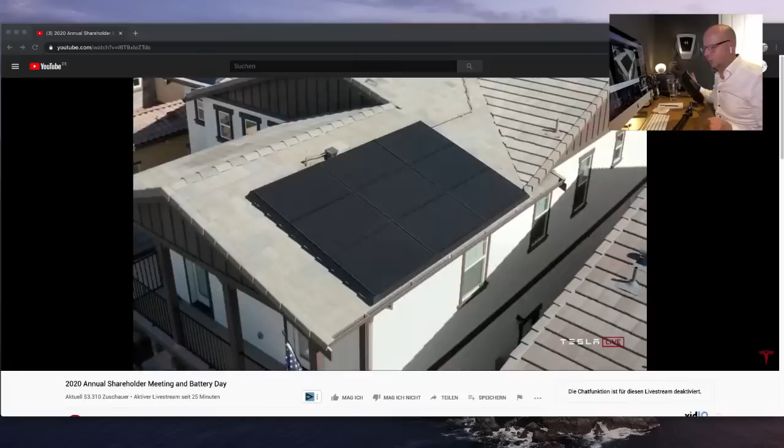Es macht keinen Sinn für mich, ein Video über, sagen wir mal, eine Zappi-Wallbox zu drehen, wenn im Hintergrund eine Heidelberg-Wallbox hängt. Das macht sich nicht gut. Also von daher werden wir demnächst da umhängen können, und dann kann ich euch auch ein paar mehr Videos zu den Wallboxen drehen.

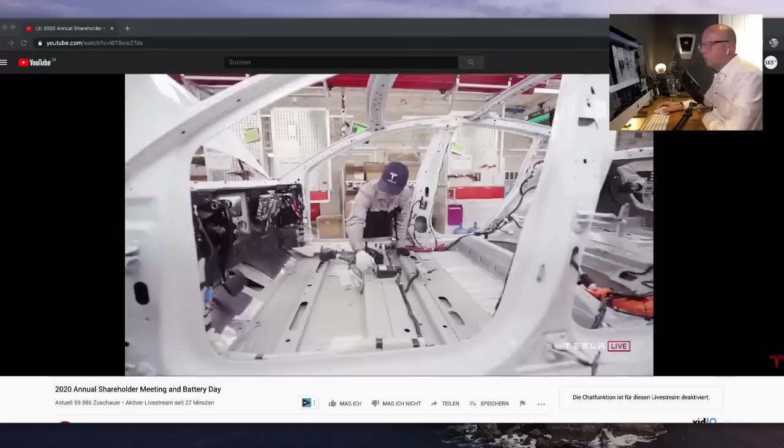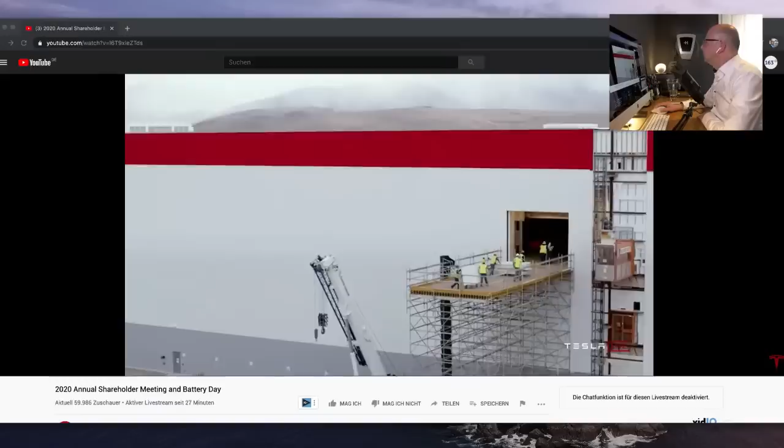Hier macht er immer Klick, Klick, wenn dir etwas kommt. Bekommst du das Klicken raus? Ja, ploppt. Wenn ich das Klicken rauskriegen würde. So, ich probiere es mal so. Jetzt ist es gemutet. Aber jetzt würde gleich das Video gemutet werden. Und insofern müssen wir mal gucken. Ich kriege dieses Klicken, das habe ich schon, es klickt. Ja, es ploppt was. Es klickt immer dann, wenn jemand von euch einen Kommentar macht. Ich mache das mal so und dann habe ich das, klickt immer noch. Also, dieses Klicken müssen wir irgendwie ertragen. Ich weiß nicht genau, wie ich es rauskriege.

Es klickt. Ja, ich kann hier nochmal gucken. Show Animated, Play App Sounds, Play Sound for certain actions. Ah ja, okay, warte. So, Klicken ist raus. Ich habe es gefunden, wie man das Klicken rauskriegt, und jetzt ist es weg.

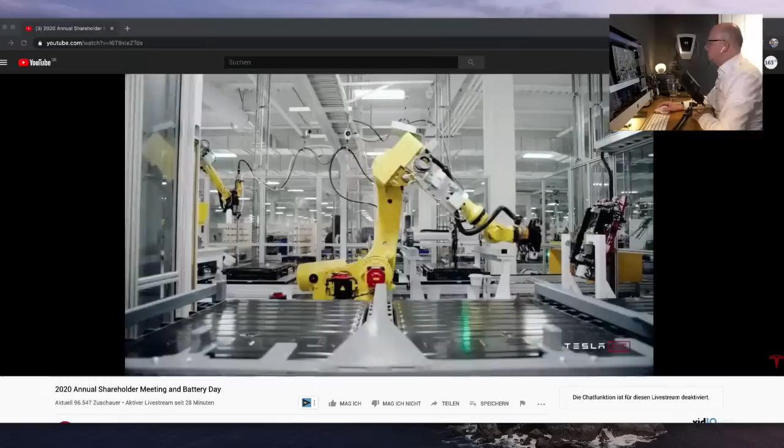Chef, bisschen leise Mikro. Ich kann das Mikro auch lauter machen, ihr müsst mir das sagen. So, jetzt ist es zu leise. Jetzt ist es zu laut. So, jetzt ist es wieder laut. Geht los, dann wollen wir mal gucken. So, das Klicken ist jetzt weg. Ich habe tatsächlich gefunden, wie man das rausmacht. Und von daher geht es los.

So, das ist der Livestream von Tesla, und tatsächlich ist hier im Moment noch nichts. 100.000 Zuschauer bei Tesla, da läuft schon der Livestream, und hier bei uns haben wir jetzt 2093 Zuschauer.

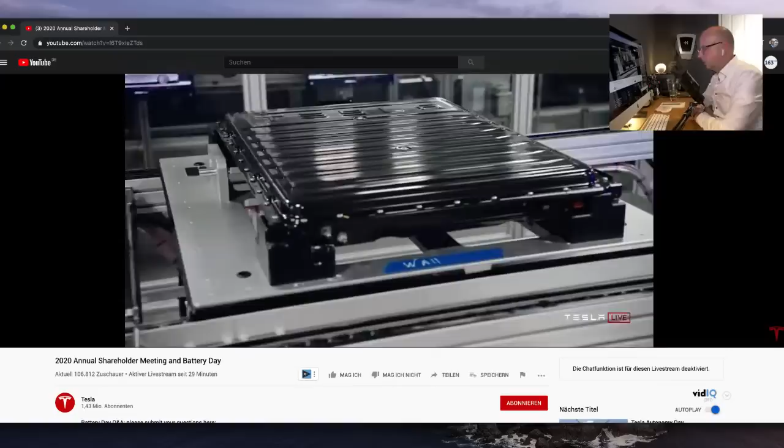So, Tesla-Video hat echt keinen Sound. Das ist auch noch nicht der Livestream, das ist ja noch so ein Werbefilm. Ich check das mal eben auf meinem iPad. Ich gehe da auch nochmal bei YouTube rein und gucke mal eben, ob wir da wirklich keinen Ton haben. Also, ich habe hier tatsächlich keinen Ton. Das ist ja auch noch nicht der aktuelle Livestream.

Warum schauen wir einen Livestream von einem Livestream? Marcel, das ist eine gute Frage. Das Ganze nennt sich hier Rudelgucken. Wir schauen es nämlich zusammen. Und insofern, Sinn macht das alles nicht, aber es macht Spaß, und darum geht's. So, wenn ich jetzt hier auf den Tesla Livestream gehe, auf meinem iPad beispielsweise, dann ist da tatsächlich auch noch kein Ton drauf. Also, noch ist kein Ton. Das ist ja auch alles noch ein Werbefilm, der uns hinhält und der entsprechend hier die Zeit überbrücken soll, bis es losgeht.

So, ich guck mal. Shoshi, Daumen hoch. Ja, natürlich. Nabend. Hat der Livestream keinen Ton? Also wie gesagt, noch hat der Livestream keinen Ton. Beim Tesla-Video ist echt kein Sound. Afrikola, richtig, also noch ist da kein Sound, noch ist da kein Ton drauf.

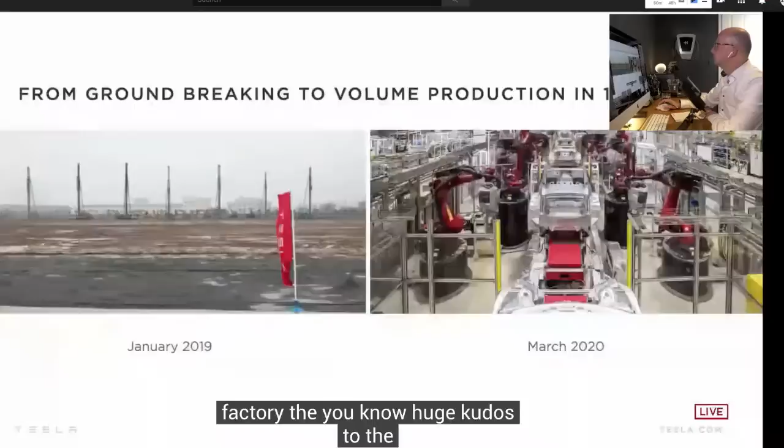I think starting from our ability to create a factory - huge kudos to the Tesla Shanghai team for being able to go from literally a dirt pile to volume production in 15 months. It's like, damn, yeah.

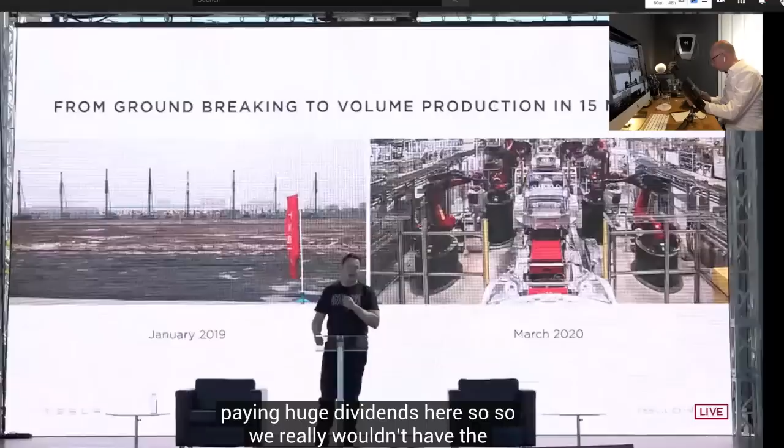I think something that's really quite noteworthy here is Tesla is the only foreign manufacturer to have a 100% owned factory in China. This is often not well understood or appreciated, but to have the only 100% owned foreign factory in China is a really big deal, and it's paying huge dividends here. We really wouldn't have the results we've had this year without the great efforts of the Tesla China team. I'm super appreciative of that.

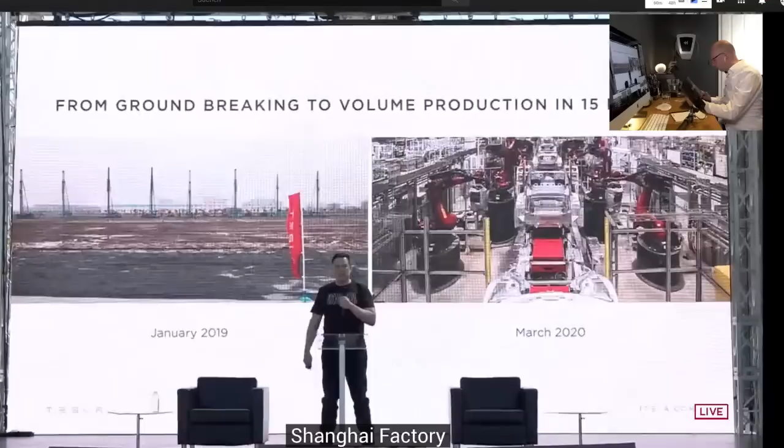We'll see the Shanghai factory continue to scale quite a bit from where it is right now. I think we could really expect that to be, over time, a factory that produces over 1 million vehicles a year. Yeah, it's cool.

So we also reached in the past year volume production of the Model Y, and this was the smoothest launch we've ever had. So I think we're definitely getting better at new vehicle launches and building factories and scaling production. As you've heard me say before, the hardest thing is scaling production, especially of a new technology. It's insanely difficult. Making a prototype is relatively easy, and if I think about what the real achievement of Tesla is in car company terms, it wasn't making exciting prototypes. It was that Tesla was really the first company in about a century in the U.S. to reach volume production and be sustainably profitable. The crazy thing is this has really not happened in 100 years. That's the actual super hard part.

And we now have 4 vehicles in volume production, S3XY. So also the toughest joke I think maybe ever - it was a very difficult joke to make.

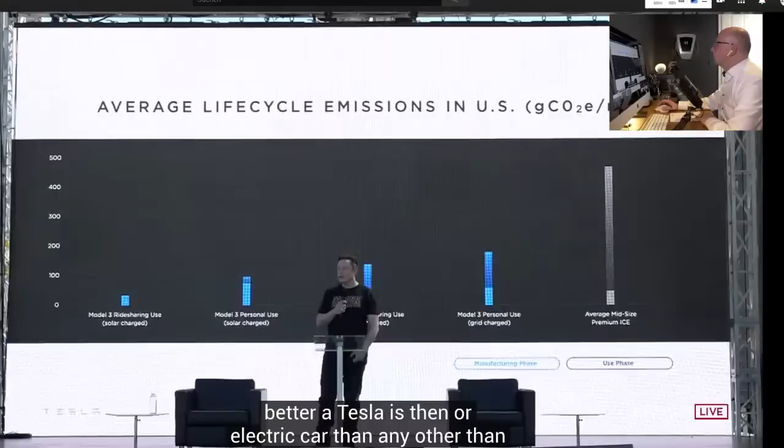It's worth looking at the average life cycle emissions in the U.S., and just how much better a Tesla or an electric car is than any kind of gasoline car. What we'll talk about in the battery day is also just how much the grids around the world, and especially in the U.S., are greening.

It's actually much faster than I think people realize. The U.S. is moving towards sustainable energy. As we move more and more to sustainable energy, you end up building the solar factories and the car factories themselves with sustainable energy. Over time you'll even mine with sustainable energy, and eventually it will get to an effective emissions of zero. So that's where things will end up.

We also have safety at the core of our design. The Tesla cars are the safest cars ever designed. We have the lowest probability of injury of any cars ever tested by the U.S. government, and that's just passive safety. When you add active safety into that, it's even better. If safety is important to you, which obviously it is, the safest car you could drive is a Tesla. Some people aren't aware of this, but safety is paramount. It is actually the number one design objective when we build a Tesla.

Our factories are also becoming safer, and if you look at accidents per total vehicle made, it's dramatically better than in the past, and it's already better than industry average. We're confident we can get it to the best in the auto industry.

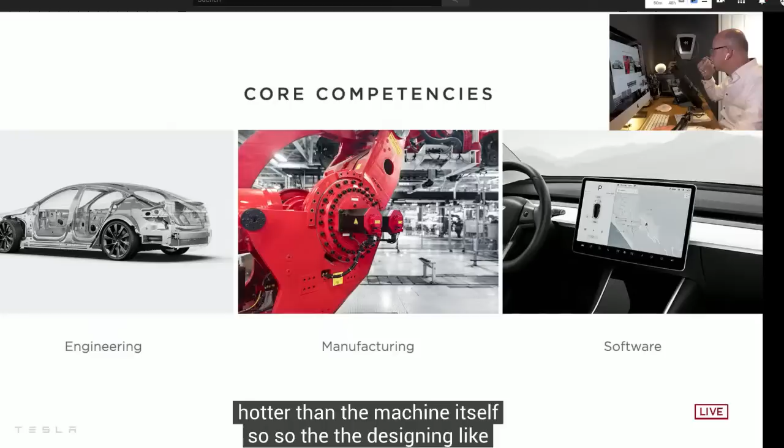Tesla core competencies: we've got engineering, obviously, but also manufacturing. I think manufacturing is underappreciated in general, and the difficulty of designing the machine that makes the machine is vastly harder than the machine itself. So designing a Model 3, Model Y, or Cybertruck prototype is really quite trivial compared to designing the factory that makes it. Especially if it's new technology and you want to use new manufacturing methods, it's at least 10 to 100 times harder to do the factory than the prototype.

That's why you see a lot of companies or startups bring out a prototype, but they just can't get it over the hump for manufacturing, because manufacturing of new technology especially is the hardest thing by far. Basically the prototype is at best 10% of the difficulty, and probably closer to 1%.

Then software. Tesla is both a hardware and a software company, so a huge percentage of our engineers are actually software engineers. You can think of our car as kind of like a laptop on wheels, so software is incredibly important, not just in the car but also in the factory. The factory software is extremely important. These are the 3 critical areas needed to make an awesome company.

So we have, and will soon have, 3 new factories on 3 different continents. Shanghai, we're expanding with the second phase. Berlin is making rapid progress, and Texas is making even faster progress.

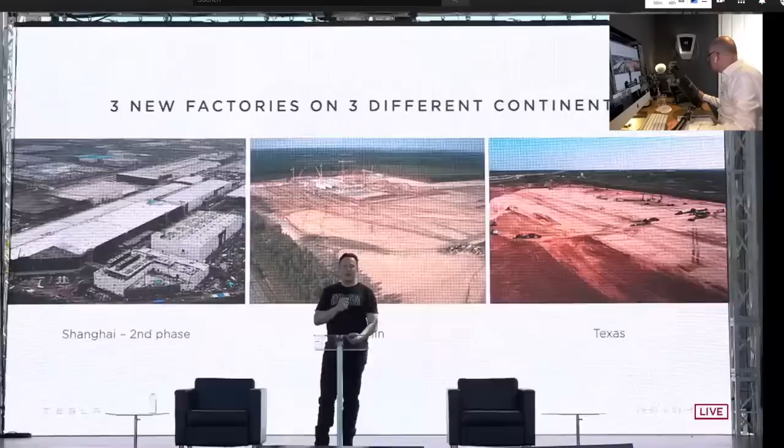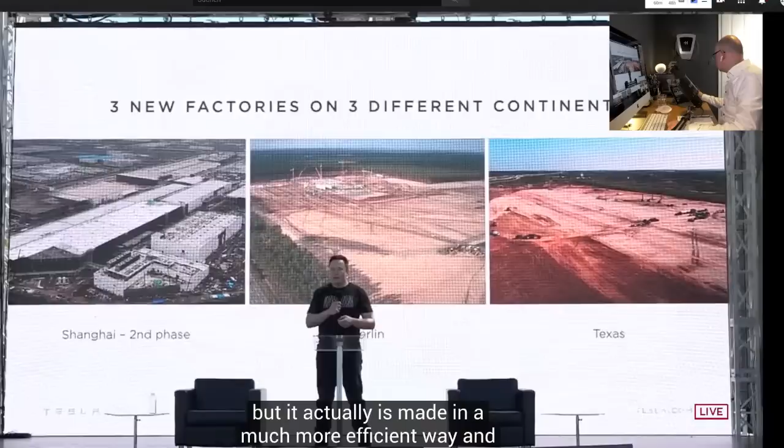With each factory, what we're trying to do is also improve the manufacturing technology. So in some cases, like the Model Y made in Berlin, it might look the same, but it's actually made in a much more efficient way. We'll talk about that later in the battery presentation. We launched Megapack, a 3 megawatt-hour all-in-one energy storage solution. So it's been great overall.

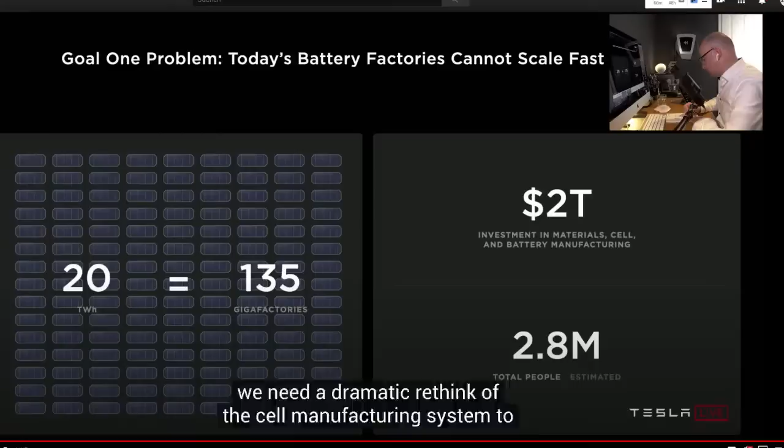So today's batteries cannot scale fast enough. They're just too small. For Giga Nevada, 150 gigawatt hours per year is what we probably expect to make out of there, but this is really pretty small in the grand scheme of things. That's only 0.15 terawatt hours. And it costs too much. We would need 135 fully built out Nevada gigafactories to achieve 20 terawatt hours a year. It's not a scalable enough solution. We need a dramatic rethink of the cell manufacturing system to scale as fast as we can and should.

I think we should view this as more than just a question of money. Money is sort of an ethereal thing, but it's really about the amount of effort. You have a certain amount of effort, in terms of people and machines, and depending on how efficient that effort is, for a given amount of effort, you want the most amount of batteries. It's not just a question of like, if we had $2 trillion, tomorrow you could make this. It's not that easy. You actually need to organize a massive number of people, build a lot of machines, build the machines that make the machines. It's incredibly important to have that effort yield the most number of batteries.

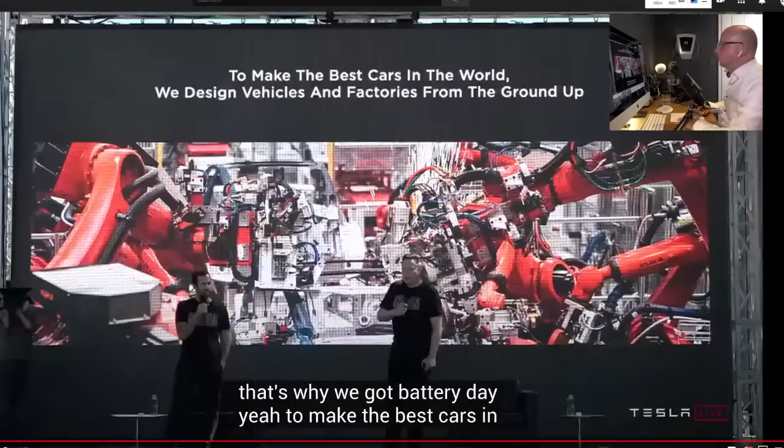So that's why we got Battery Day. To make the best cars in the world, we design vehicles and factories from the ground up. And now we do this for batteries as well.

It's weird, the slides don't show up quite right. What shows up on the screen is not quite what shows up there. Oh, okay, it's different. Yeah, I think it's because... no, that one's current, supposed to be current. Anyway, so let's get started.

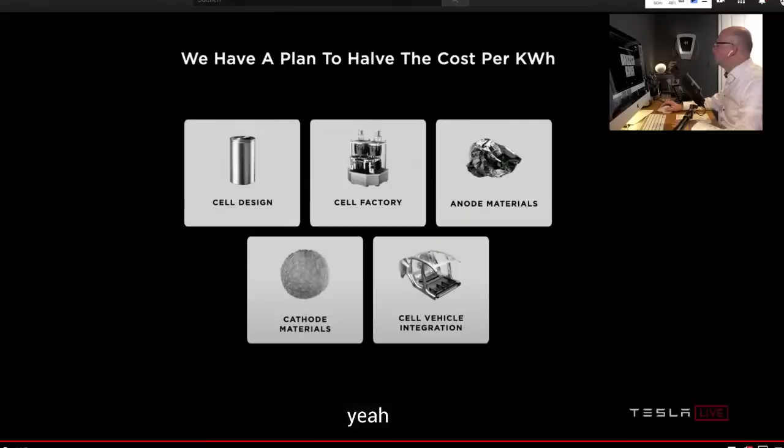We have a plan to halve the cost per kilowatt hour. And it's not a plan that rests on a single innovation, some research project that'll never see the light of day. It's a plan that has taken creative engineering and industrialization across every facet of what makes a cell into a battery pack, from raw material to the finished thing.

And we're going to go through that plan with you today, step by step, and build up how we get to these goals and how we accelerate this transition and make our vehicles and our grid batteries more affordable. We basically thought through every element of the battery, well, almost every element. There are a few more elements that we won't get to today, but we will get to in the future.

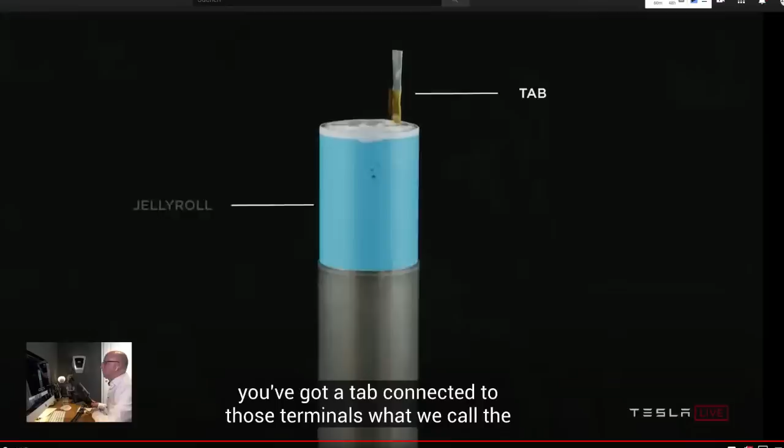So first, before we get too far into it, let's talk about what is in a battery cell. We've got the cap and the can, negative and positive terminals of the cell. When you open that cell, you've got a tab connected to those terminals, what we call the jelly roll, which is the wound electrodes on the inside.

You can actually see what this looks like as you unwind it. This is over 1 meter long in a typical 2170 cell, so it's quite a long winding process. And you can see the tab still there.

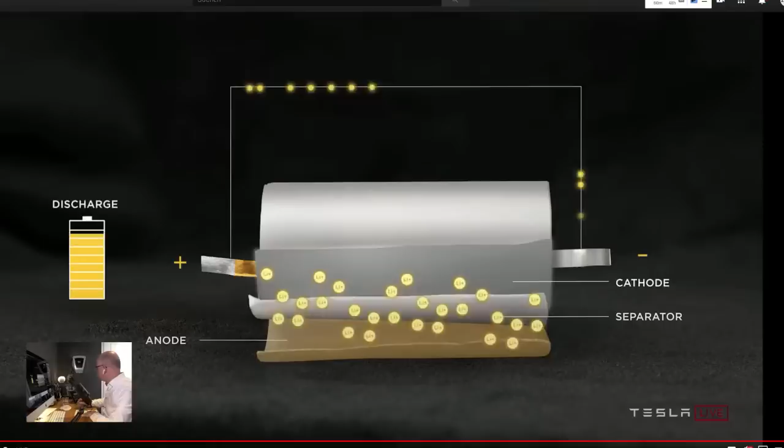And then to explain what's actually going on here, we've identified we've got anode, cathode, separator, positive and negative terminal. Watch what happens as we discharge the cell. We've got lithium moving from anode to cathode, and then the reverse. When we charge the cell, lithium moves from cathode to anode across the separator.

This is the basic of what makes all lithium-ion batteries, no matter what the form factor is.

And when we look at what's happened to date, at least in our products, we've moved from the 18650 form factor to the 2170 form factor through great collaboration with our partners, Panasonic, new partners like LG and CATL, and probably others in the future.

A slight note on why is the one called the 18650, versus the 2170: the first 2 digits refer to the diameter, and the second 2 digits refer to the length. That helps explain why these weird numbers. But nobody could explain to me why there was an extra 0. So I said, okay, well, we're deleting the 0 that nobody can explain in future form factors. So technically it's like the 18650, but going forward it's the 2170 because we just got rid of the extra 0 because it's pointless.

And this was an evolutionary step, going from 18650 to 2170, bringing 50% more energy into the cell. But when we look to the ideal cell design, if we were to do it ourselves, we need to go beyond just what we're looking at in front of us and study the full spectrum of options.

So as you can see, we swept the key figures of merit, how much we can reduce the cost, and how much vehicle range increases as we change the outer diameter of the cell. We found a sweet spot somewhere around 46 millimeters.

I want to stress, this is not just a concept or a rendering. We are starting to ramp up manufacturing of these cells at our pilot 10 gigawatt hour production facility just around the corner. It's a video of some of what's going on in the plant.

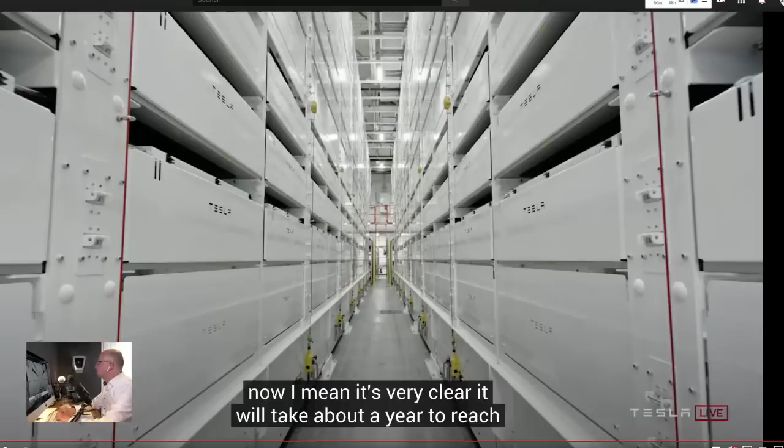To be clear, it will take about a year to reach the 10 gigawatt hour capacity. This is important to appreciate. When you build a factory, there's a certain capacity that you design to, and then it takes some period of time to actually achieve that capacity. So I'd say it's probably about a year before we get to the 10 gigawatt hour annualized rate with the pilot plant. And this is just a pilot plant. The actual production plants will be more on the order of maybe 200 gigawatt hours, maybe more over time. And thank you.

But let's stack up everything we just saw at the cell level. Just the cell form factor change enables a 14% dollar per kilowatt hour reduction, just that cell form factor change. And now that you've been teased on this factory, we're going to go on and walk step by step through that factory and discuss a series of innovations there.

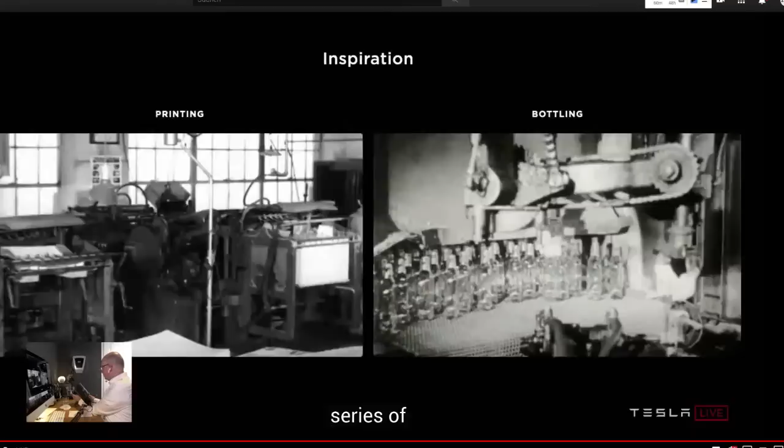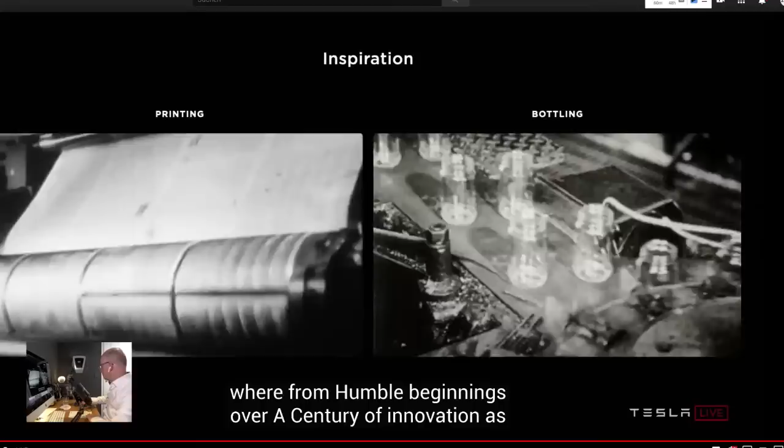When thinking about the ideal cell factory, we have inspirations behind us in the printing and bottling industry, where from humble beginnings, over a century of innovation has enabled mass scale, continuous motion, unbelievably low manufacturing cost. And when we think about the lithium-ion industry, which is really only in its 3rd decade of high-volume production, it has so far to go to achieve similar scale and simplicity. And that was the inspiration that we set out to the team as we thought about how to marry cell design and manufacturing in the best possible factory.

Let's talk about what's in a cell factory. First, there's an electrode process where active materials are coated into films onto foils. Then those coated foils are wound in the winding process we just talked about, where if you do have tabs, you have to start and stop a lot. Then the jelly roll is assembled into the can, sealed, filled with electrolyte, and sent to formation, where the cell is charged for the first time, the electrochemistry is set, and the quality of the cell is verified. At every step of this process we set out to take the inspiration we just showed and think about how we make those processes fundamentally better and more scalable.

One of the most important processes is where it all begins: the wet process of the electrode coating. Just to give you a sense of scale, I'm going to walk through what's in that wet process.

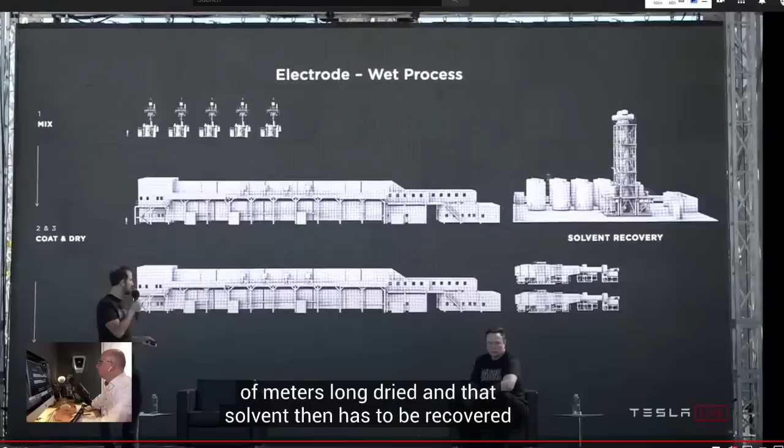You've got mixing, where the powders are mixed with either water or a solvent—solvents for the cathode. That mix then goes into a large coat and dry oven where the slurry is coated onto the foil. Huge ovens, tens of meters long. It's dried, and that solvent then has to be recovered—you can see the solvent recovery system. Finally, the coated foil is compressed to the final density.

When you're looking at this, you think, wow, that's a lot of equipment for one step, especially when you consider that little speck next to the coating oven is a person. This is serious iron involved in making batteries.

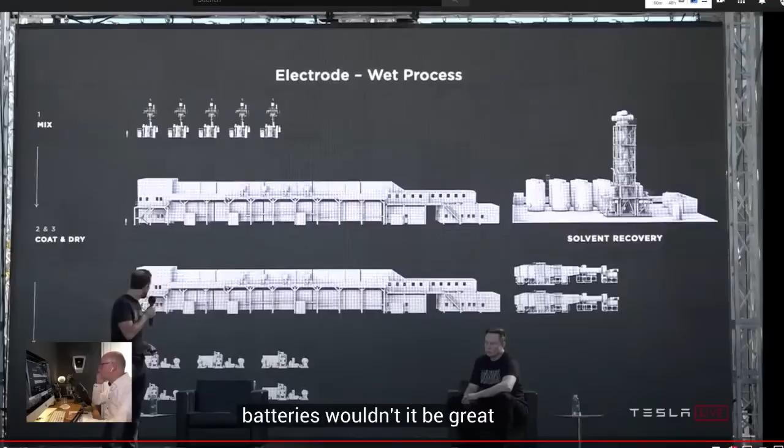Wouldn't it be great if we could skip that solvent step, which is one of those dig-a-ditch-and-then-fill-it kind of things, where you put the solvent in and then take it out and recycle it, and just go straight from dry mix to coat? That's what the dry process is really about.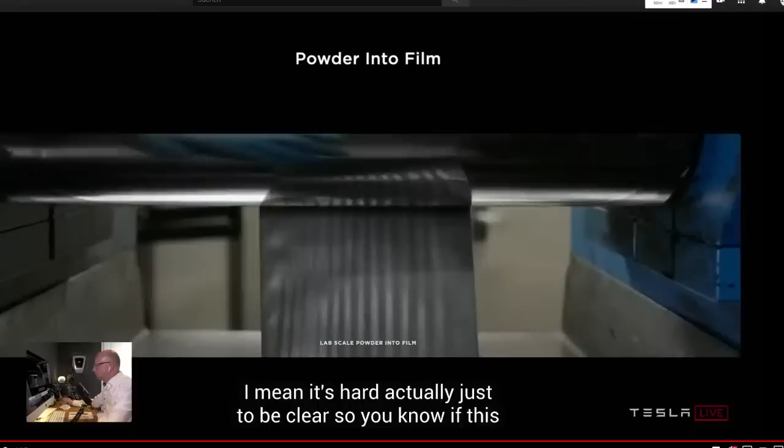In the most basic form, you can see it here on a bench top—literally, powder into film, as simple as that. I mean, it's hard actually, just to be clear. If this was easy, everyone would do it. So dry coating electrode is not actually easy. It's very hard to do what appears to be a simple thing.

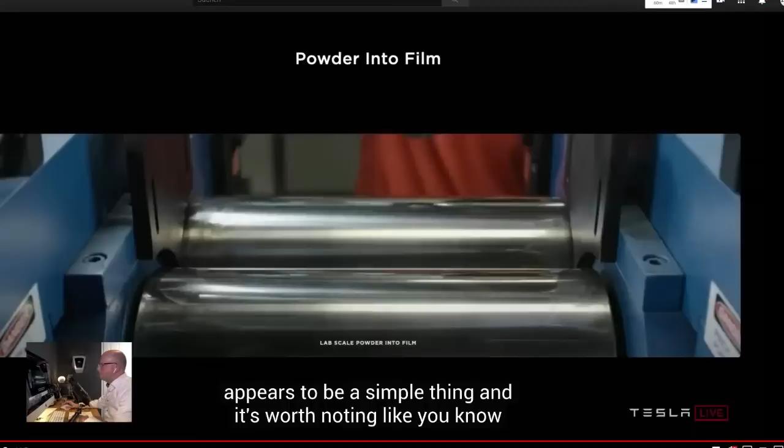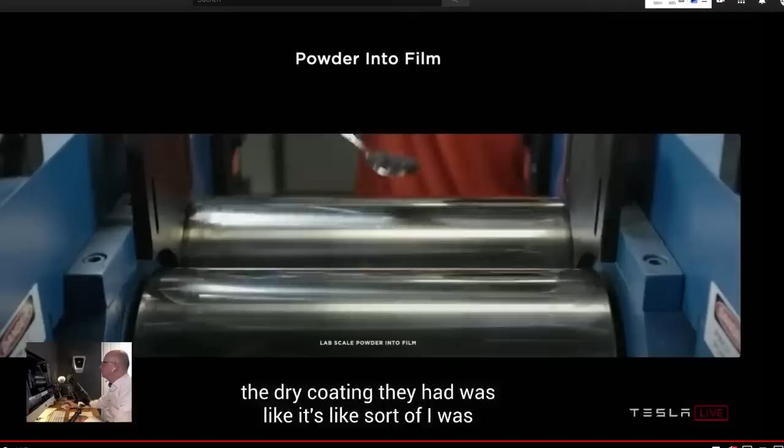It's worth noting we acquired Maxwell a little over a year ago. It's certainly a good company, but the dry coating they had was like, I'd call it proof of concept. Since the acquisition, we've actually revved the machine that does the dry coating four times—we're on revision four post-acquisition. And there's still a lot of work to do. I would not say this is completely in the bag.

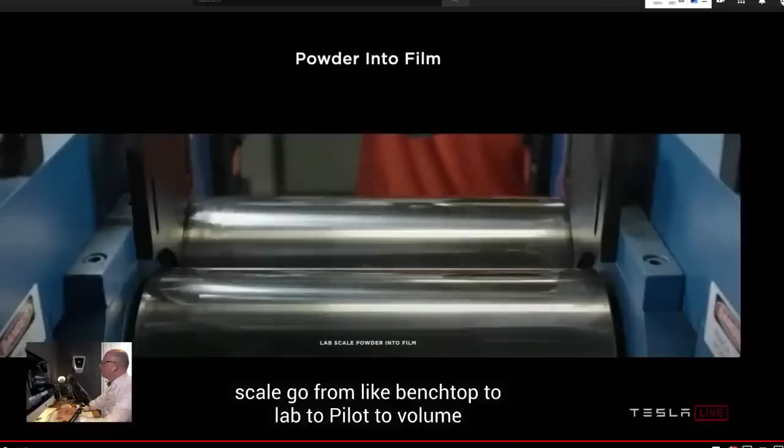As you go from benchtop to lab to pilot to volume production, there are actually major issues that you encounter at every level. It's not like you make something work on your bench and bingo, now you can make a bazillion of it. It's insanely difficult to scale up.

But if you do scale it up, what you saw before becomes this. So you can see the motivation: a 10 times reduction in footprint, a 10 times reduction in energy, and a massive reduction in investment. But as Elon was saying, simple is hard.

To be clear, I wouldn't say right now it's just totally working. It's close to working, but even at the pilot plant level, it's not quite there yet. Well, it's fair to say it does work, but not with a high yield. So we're still ironing out the kinks, but we've made tens of thousands of cells, thousands of kilometers of electrode. We're on the 4th generation of the equipment, so we've learned a lot along the way.

It is super demanding because every atom has its place if you want to deliver the energy density, the cycle life, and the supercharging. But we're confident that we will get there, though it will be a lot of work along the way. There's a clear path to success, but a ton of work between here and there.

Yep, but this is a really profound improvement. Again, for people that know battery manufacturing, this is gigantic. We'll probably be on machine revision 6 or 7 by the time we do large-scale production. The rate at which the machines are being improved is extremely rapid, like literally every 3 or 4 months is a new rev.

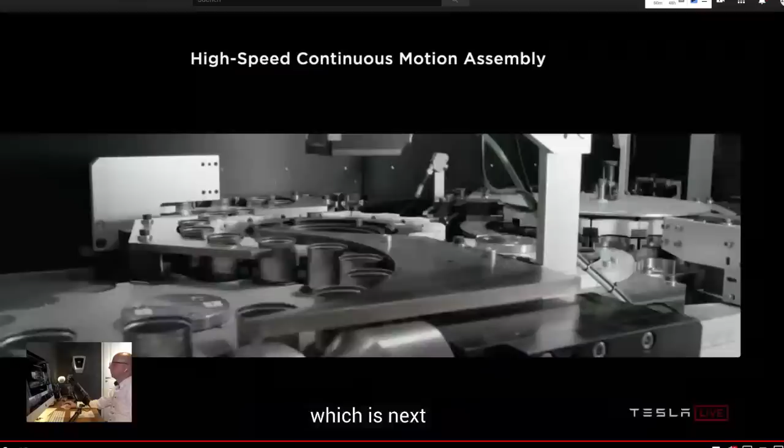And beyond the electrode, we continue to innovate on every other process step. So let's talk a little bit about assembly, which is next. The key to a high-performing assembly line is accomplishing processes while in continuous motion, thinking of the line as a highway: max velocity down the highway, no start and stop, no city driving. Exactly, no stoplights or traffic lights. You want the highway. I want the highway.

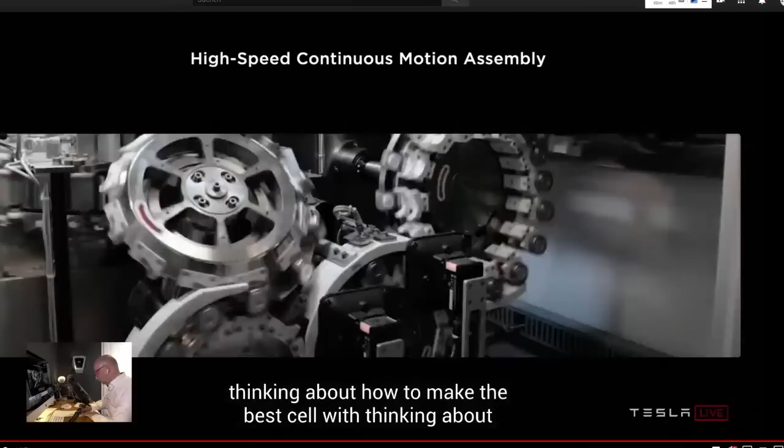And together with our internal design team that makes and designs this equipment, we coupled thinking about how to make the best cell with thinking about how to make the best equipment, so we could accomplish the fastest parts per minute rates on all of these tools. Through all of that development, we got to the point where we can implement assembly lines, one line, 20 gigawatt hours, a 7 times increase in output per line. When you're thinking about scalability and pure effort, having one line be 7x the capability is just effort multiplying.

You can think about the fundamental physics of a factory. It's actually quite a lot like the rocket equation, where you've got your exhaust velocity and then the log of the start to end masses. So it's basically saying, how fast are things going, and what percentage of the factory volume is doing useful work. Conveyance does not count as useful work, so only the value-added steps.

If you break the factory down into cubic meter sections, or smaller, like 1 liter sections, and ask, is a majority of this volume doing useful work, you would be astounded at how bad most factories are. They're like maybe 2 or 3%, including our factory in Fremont. I think it is possible to get to at least 10 times that volumetric efficiency, more like 30%, maybe more, and be 10x better, which means the factory can be 10 times smaller.

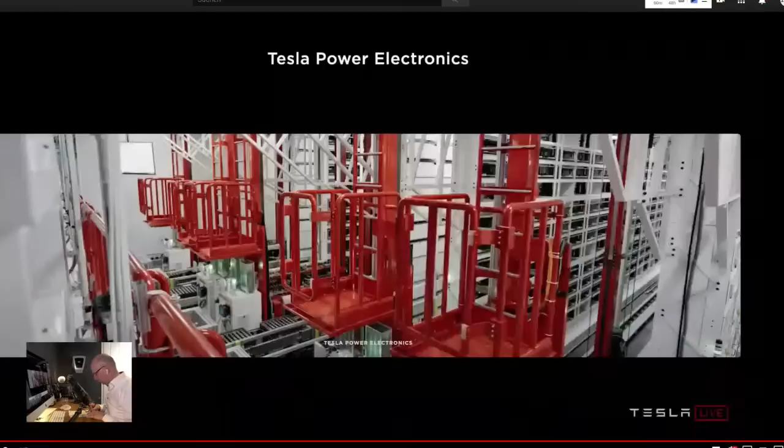Manufacturing is hard, and hard problems are fun to solve. Okay, now let's talk about formation. In a typical cell factory, formation represents 25% of the investment. And what is formation? It's charging and discharging cells and verifying the quality of the cell.

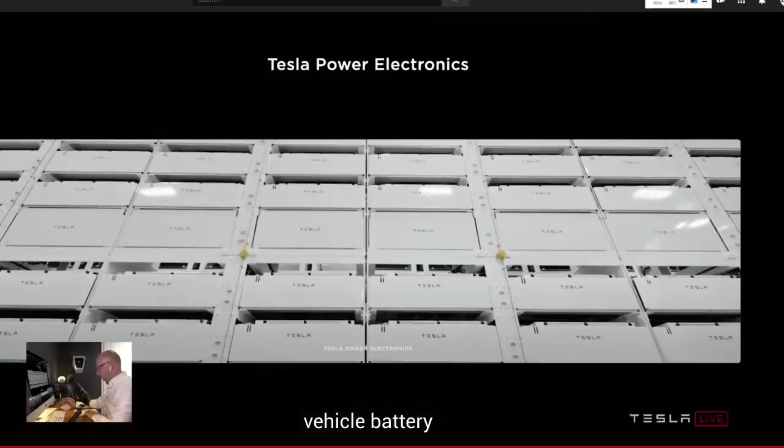Turns out we've charged and discharged billions and billions of cells in our vehicles, so we know a thing or two about that. The typical formation setup is you charge and discharge each cell individually. In our car, we charge thousands of cells at once. We took our principles and our power electronics, leveraging Powerwall, vehicle battery management systems, and others, to dramatically improve the formation equipment's cost effectiveness and density: an 86% reduction in formation investment, and a 75% reduction in footprint.

You want to take this one?

Essentially what this translates to, based on what we know today, is about a 75% reduction in the investment per kilowatt hour or gigawatt hour. It's basically 4 times better than the current state of the art, to the best of our knowledge. And I think there's probably room to improve even beyond that. Definitely, yeah.

From a volume standpoint, in a smaller form factor than Giga Nevada, we're able to get many times the cell output. So basically we can get a terawatt hour in less space than it took to make a gigawatt hour - 150 gigawatt hours. This is pretty profound. I would not have thought this was possible several years ago, that we could get to terawatt hour scale in less space than what we currently envision for doing 150 gigawatt hours. So yes, simpler accelerates terawatt hour scale, and that's what we need to do to accelerate our mission.

And as Elon said, we're going to try to even improve on this as we push towards our goals, which are...

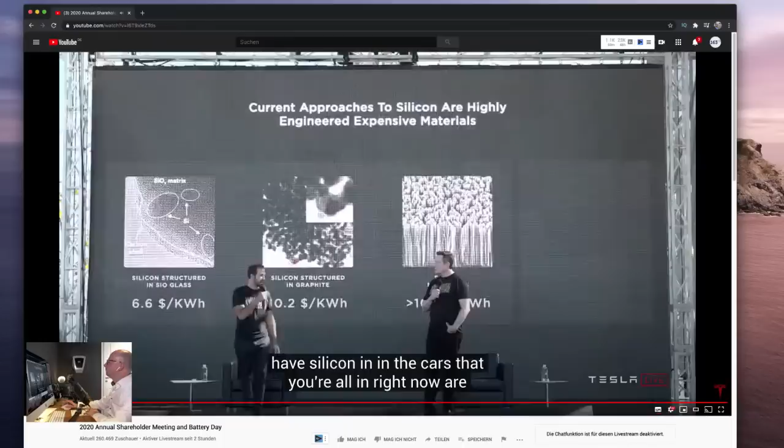Current approaches to solve this, which exist - we have silicon in the cars you're all in right now - involve highly engineered, expensive materials in the scheme of things. They're still great, and they enable some of the benefits of silicon, they just don't enable all of it, and they're not scalable enough. You can see some of the things you may have heard of - SiO, silicon with carbon, or silicon nanowires. That's kind of the space right now.

What we're proposing is a step change in capability and a step change in cost. And what that really is, is to just go to the raw metallurgical silicon itself. Don't engineer the base metal - just start with that and design for it to expand in how you think of the particle in the electrode design and how you coat it.

I'm not sure if you saw this - basically $1 per kilowatt hour. If you use simple silicon, it's dramatically less than even the silicon that is currently used in the batteries made today. And you can use a lot more of it. The anode, with this silicon, would cost $1.20 a kilowatt hour.

And how does it work?

Start with raw metallurgical silicon, stabilize the surface with an elastic ion-conducting polymer coating that is applied through a very scalable approach. No chemical vapor deposition, no highly engineered high capex solutions, and then integrate it into the electrode through a robust network formed out of a highly elastic binder.

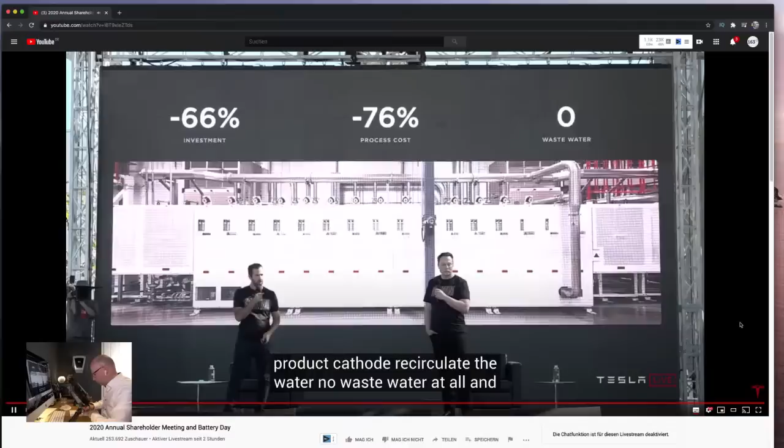As you can see, a whole lot less is going on here. We get rid of the intermediate metal, water, final product cathode, recirculate the water—no wastewater at all. When you summarize all of that, it's a 66% reduction in CapEx investment, a 76% reduction in process cost, and zero wastewater. Much more scalable solution.

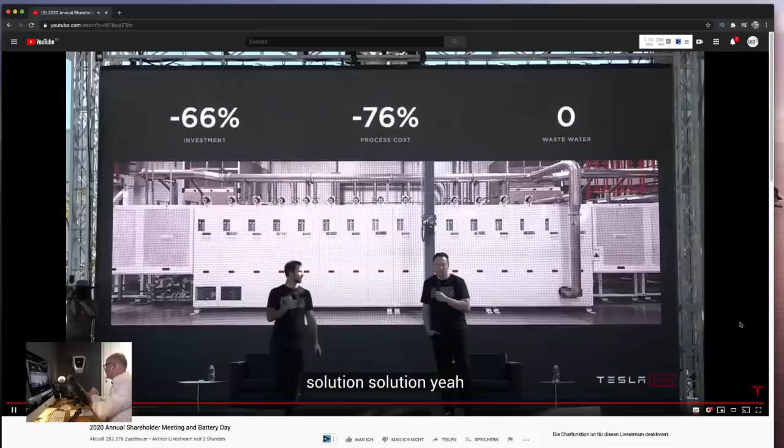And then when you think about the fact that now we're actually just directly consuming the raw metal nickel powder, it dramatically simplifies the metal refining part of the whole process. So we can eliminate billions in battery-grade nickel intermediate production. It's not needed at all.

And we can also use that same process we showed on the previous page to directly consume the metal powder coming out of recycled electric vehicle and grid storage batteries. So this process enables both simpler mining and simpler recycling.

Now that we have this process, obviously we're going to go and start building our own cathode facility in North America, leveraging all of the North American resources that exist for nickel and lithium. And just doing that—localizing our cathode supply chain and production—we can reduce miles traveled by all the materials that end up in the cathode by 80%, which is huge for cost.

To be clear, cathode production would be part of the Tesla cell production plant. So it would just be raw materials coming from the mine, and from raw materials in the mine, out comes a battery. And on that note, the way the lithium ends up in the cell is through the cathode.

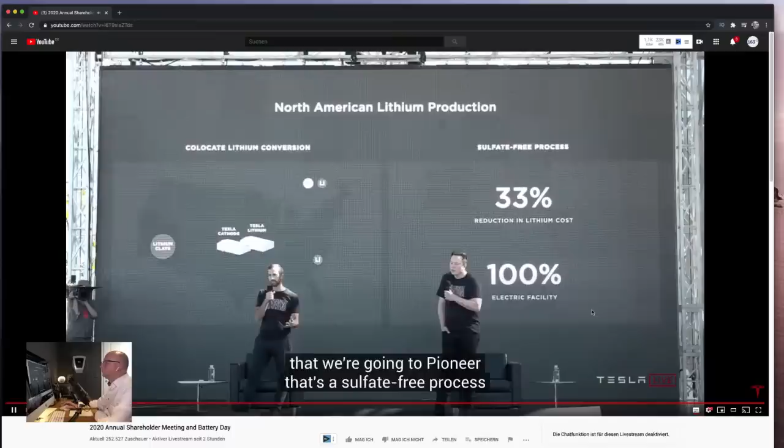So then we should obviously do on-site lithium conversion as well, which is what we will do using a new process that we're going to pioneer. That's a sulfate-free process again, skip the intermediate. 33% reduction in lithium cost, and it's a 100% electric facility co-located with the cathode plant.

It's important to note that there is a massive amount of lithium on Earth. So lithium is not like oil—there's a massive amount of it pretty much everywhere. In fact, there's enough lithium in the United States to convert the entire United States fleet to electric. Like all the cars in the United States, there's 300 million or something like that. Every vehicle in the United States can be converted to electric using only lithium that is available in the United States—discovered today, what we already know exists.

People really haven't even been looking—people haven't been trying because it's just so widely available. But it is important to say, okay, what is the smartest way to take the ore and extract the lithium and do so in an environmentally friendly way? And we actually discovered, again looking at it from a first principles physics standpoint instead of just the way it's always been done, that we can actually use table salt, sodium chloride, to basically extract the lithium from the ore.

Nobody's done this before, to the best of my knowledge. All the elements are reusable, and it's a very sustainable way of obtaining lithium. We actually got rights to a lithium clay deposit in Nevada.

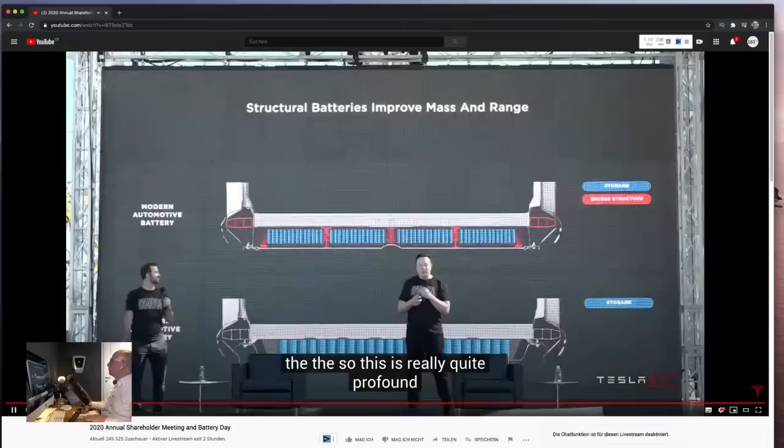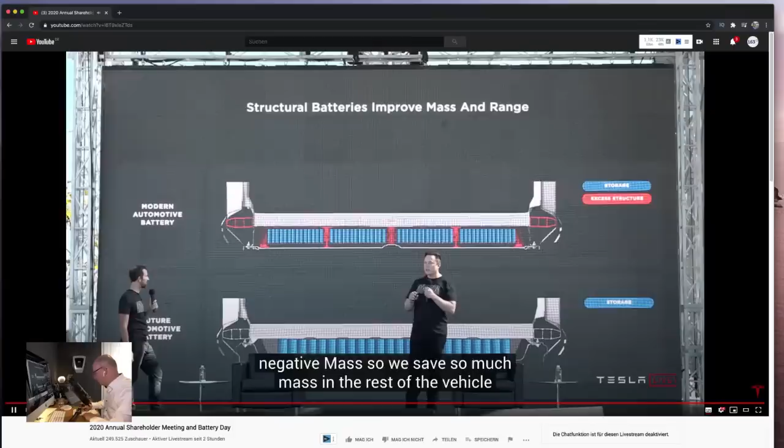We're doing the same for cars. So this is really quite profound. Effectively, the non-cell portion of the battery has negative mass. We save so much mass in the rest of the vehicle, more mass than the non-cell portion of the battery. So it's like, well, how do you really minimize the mass of a battery? Make it negative. Make the non-cell portion of the battery pack negative.

It also allows us to pack the cells more densely because we do not have intermediate structure in the battery pack. Instead of having supports and stabilizers and stringers and structural elements in the battery, we now have a lot more space because the pack itself is structural.

What we do is, instead of having just a filler that is a flame retardant, which is currently what is in the battery packs, we have a filler that is a structural adhesive as well as flame retardant. So it effectively glues the cells to the top and bottom sheet, and this allows you to do shear transfer between the upper and lower sheet.

Just like if you have a Formula One car or a racing boat, with carbon fiber face sheets and aluminum honeycomb between them, this gives you incredible stiffness. It's really the way any super fast thing works, you create basically a honeycomb sandwich with two face sheets.

This is actually even better than what aircraft do, because aircraft can't do this, since fuel is liquid. In our case, the batteries are solid, so we can actually use the steel shell case of the battery to transfer shear from the upper and lower face sheet, which makes for an incredibly stiff structure, even stiffer than a regular car.

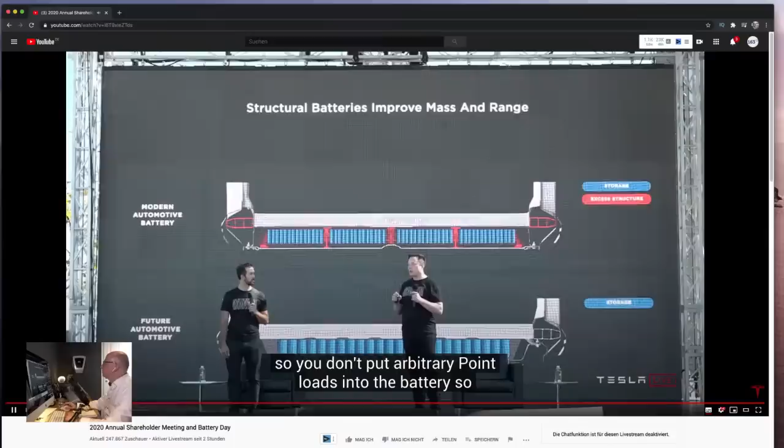So it improves the mass efficiency of the battery, and the castings are also quite important because you want to transfer load into the structural battery pack in a very smooth, continuous way, so you don't put arbitrary point loads into the battery. You want to sort of feather the load out from the front and rear into the structural battery.

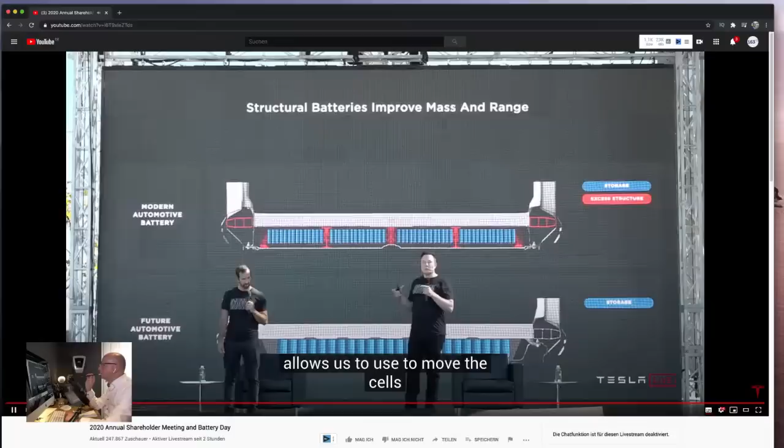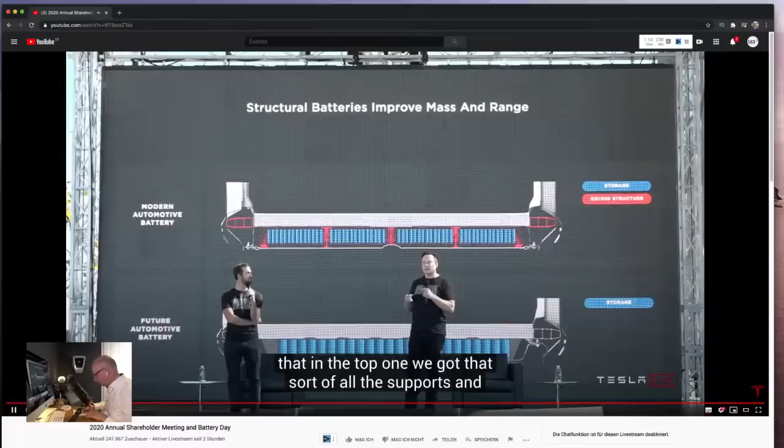It also allows us to move the cells closer to the center of the car, because we don't have all the supports and stuff like in the non-structural pack. So the volumetric efficiency of the structural pack is much better, and we bring the cells closer to the center, which reduces the probability of a side impact potentially contacting the cells, because any kind of side impact has to go further in order to reach the cells.

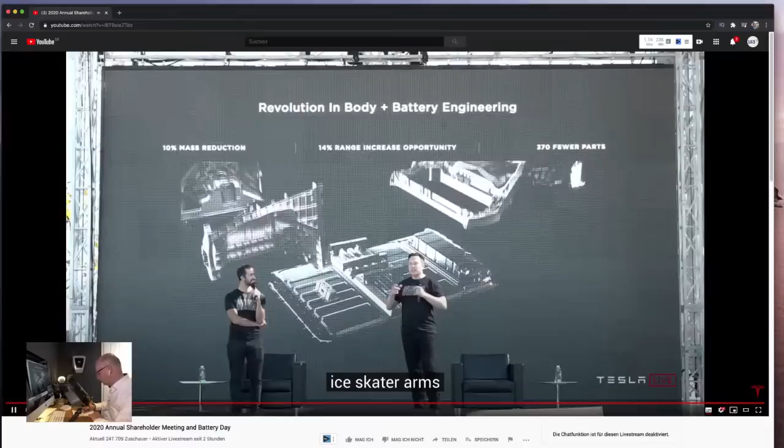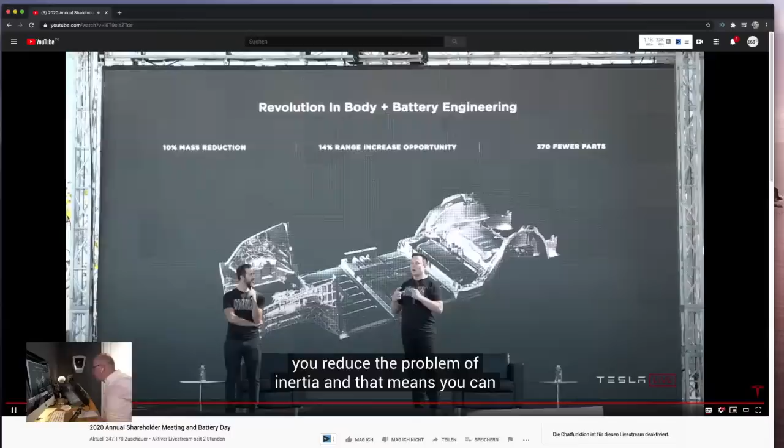It also improves what's called the polar moment of inertia, which you can think of like an ice skater with arms out or arms in. Arms in, you rotate faster. So if you can bring things closer to the center, you reduce the polar moment of inertia, and that means the car maneuvers better. It just feels better, you won't know why, but it just feels more agile. This is really major.

Like I said, 10% mass reduction in the body of the car, 14% range increase, and 370 fewer parts.

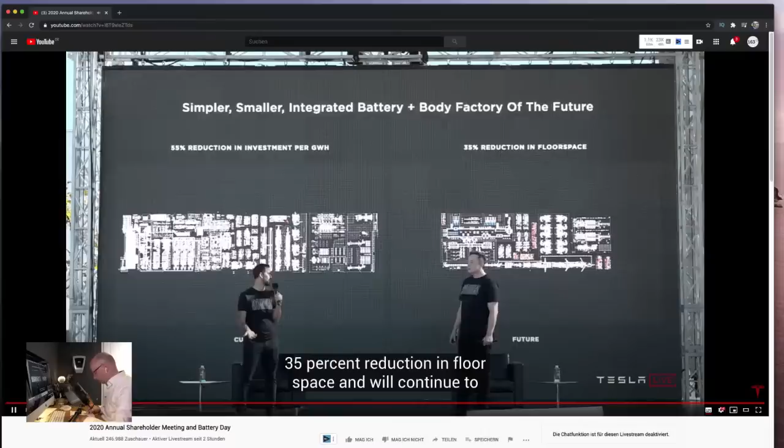I really think that long term, any cars that do not take this architecture will not be competitive. And it's not just a better product at the product level, but in the factory it's a massive simplification. You saw the part removal, the casting machines, the structural battery pack. We're looking at 55% reduction in investment per gigawatt hour, 35% reduction in floor space, and we'll continue to improve that as we make the vehicle factory of the future. So it's major improvements on all fronts, from the cell all the way to the vehicle. In addition to enabling additional range and improving the structural performance of the vehicle, it's worth another 7% dollar-per-kilowatt-hour reduction at the battery pack level, bringing our total reduction to 56% dollars per kilowatt hour.

So stacking it up, we're not just talking about cost or range, we've got to look at all the facets. Range increase: we're unlocking up to 54% increase in range for our vehicles and energy density for our energy products. 56% reduction in dollars per kilowatt hour at the battery pack level, and a 69% reduction in investment per gigawatt hour, which is the true enabler when we talk about how we achieve this scale problem.

So I think it's pretty nice that the investment per gigawatt hour reduction is 69%. I mean, who would have thought? Yeah, just happened to work out that way. I mean, 0.420%, of course.

So what this enables us to do is achieve a new trajectory in the reduction of cell cost. To be clear, it will take us probably a year to 18 months to start realizing these advantages, and probably about 3 years or thereabouts to fully realize them. So it's not like we could do this instantly, but I think what this bodes for is really good for the future, and means the long-term scaling of Tesla and the sustainable energy products we make will be massively increased. What tends to happen as companies get bigger is things tend to slow down. Well, actually, ours are going to speed up, and they have to speed up if we're going to accelerate the transition to sustainable energy.